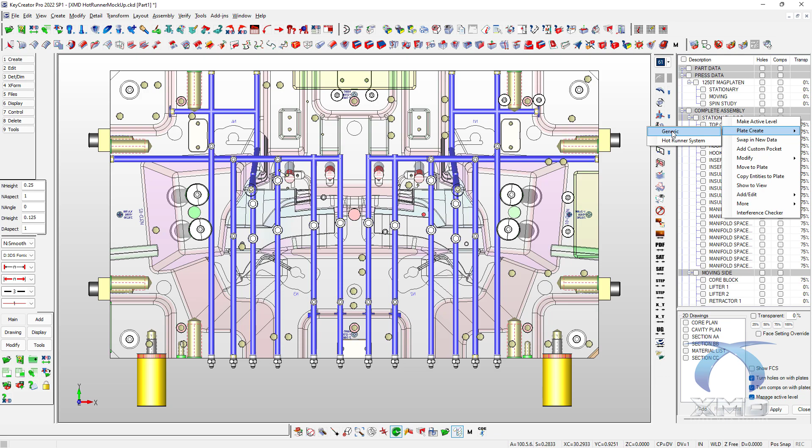So we're going to go into our design navigator. We're going to right click on stationary side, and we're going to tell it to plate create. So we have our generic plates, which does our lifters, slides, inserts, things like that. But in this case, we want to do a hot runner system. It'll come up with some information on the hot runner.

Maybe you're planning to get this quoted at a few different vendors, so we'll just put TBD in there for catalog number and vendor. You can always edit that after you know who it's coming from and what all that info is. We wanted to draw in the 3D hot runner system, and we wanted to draw in the drop bores as well. And this will allow us to have something in our cavity block that we can work water around.

Generally what I'll do is I'll aim to be bigger than what I expect the drop bores to be. You may even be able to get some information from your supplier right away to put in those sizes if possible. If not, just put something in that is a guess that is hopefully larger than what you really need and gives you a little bit of space.

We want a 4-drop system, so apply that. And we're going to use the mirrored function. If we were to use custom, then you would just select all 4 at different positions. Quadrant would allow you to pick one location, and that identical location at each quadrant would also get a drop. In this case, we're just going to use the mirror function.

We're also going to have it set to project the Z. That way, because I have a cavity solid block, it will automatically work out the lengths of the drops for me. I don't even have to figure that out. If you don't have your design quite that far, you can turn this off and you could actually specify where the drop tips will be.

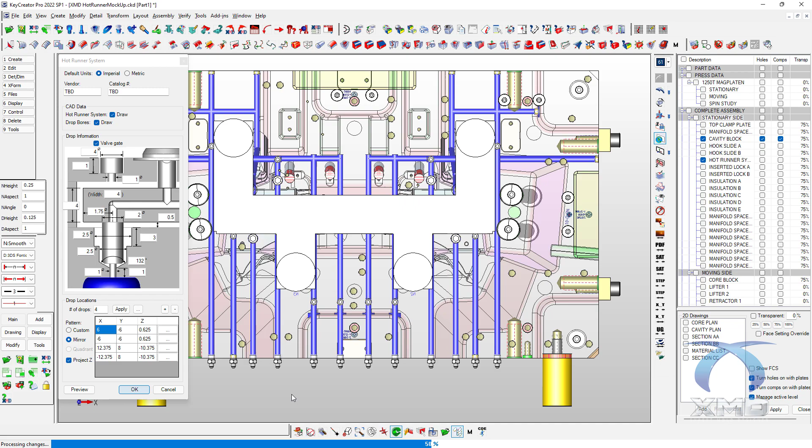Once again, it's just a mock-up. It's something that we can now send to our supplier and say, okay, this is our manifold location, our drop locations, how long the drops are. Obviously, you put your engraving on the side of the block or something showing where top of mold and operator side is, so they can put all the fittings in the right location.

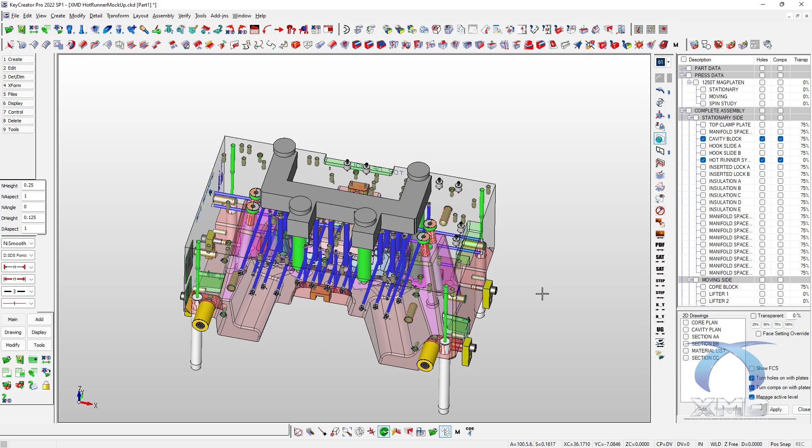And then you can go ahead and output this file. Right, so you can just turn on whichever plates you need, including the part data, output a step file, and your supplier will have a location. That's it for adding a mocked up manifold.

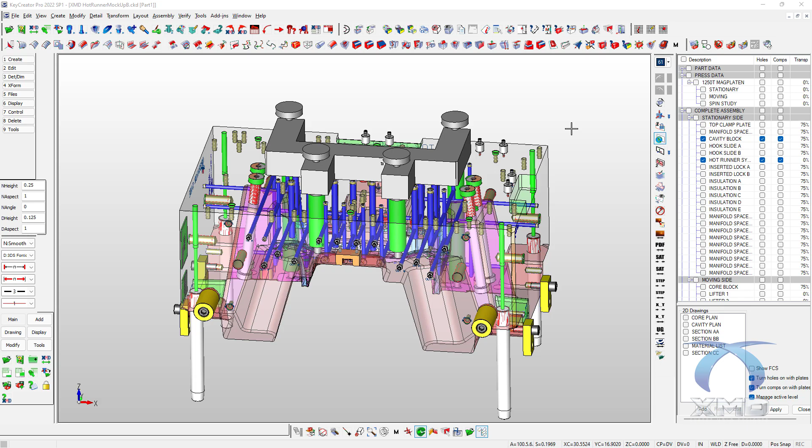Okay, so our next stage here is to bring in the design that we received from our vendor. Right? So what we're going to do is we would import step or parasolid or whatever file type they send us, and just put them on dummy levels, non-XMD levels. So in this case, I put their manifold system on 5001.

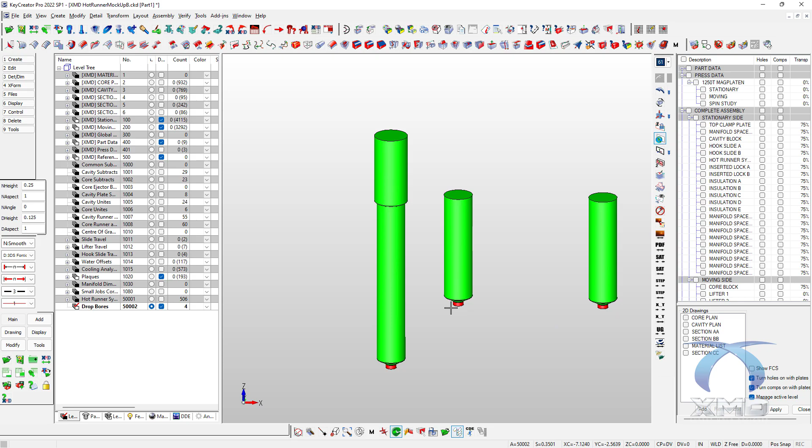I also separated the drop bores onto another level, and I color coded them to whatever my company's specs are for clearance and critical holes. Right? That way I can show you a really cool feature for that as well. So what we want to do is we want to turn on our hot runner system in our cavity block.

And what we're going to do is we're going to right click on hot runner system, and we're going to do a modify, right? And what we want to do is turn off the drop bores now, because now we have really specific ones that our supplier has sent us. And we also want to, while we're at it, update our vendor and catalog stuff since we know it.

Okay, so I'm just going to put Acme for the vendor, and we'll just say the catalog number is whatever, right? So it's generally their project number, whatever the project number is for that, for our vendor. And go ahead and say okay.

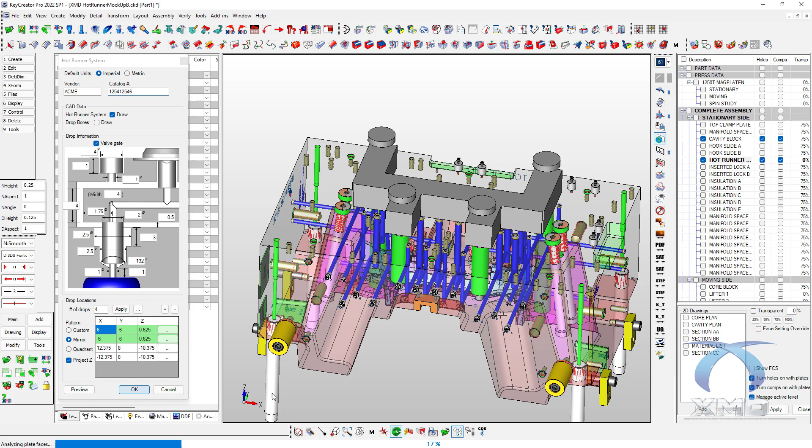That's going to update our design in our material list to have the catalog number and that vendor, and it's going to also remove those drop bores that we're currently showing in our cavity block. This will then allow us to use those drop bores we received from our manifold supplier and apply them to the cavity block instead.

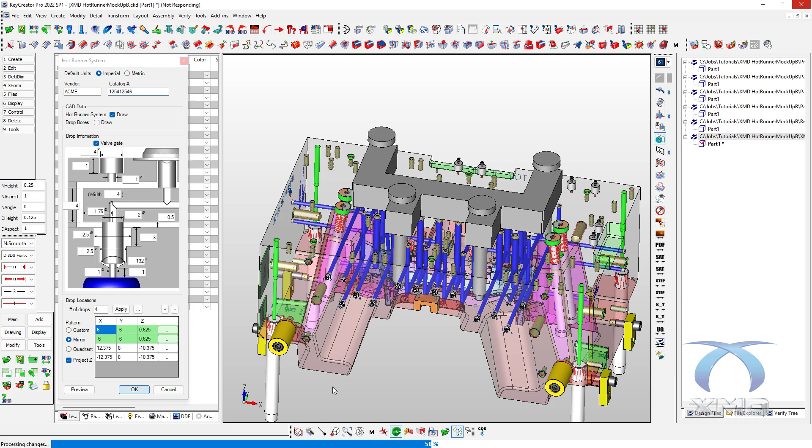So now that we've done that, what we're going to do is we're going to go ahead and do a swap. Okay? So we have our hot runner system, we brought it in. Now keep in mind, they don't always provide that system in the exact mold location depending on the vendor, so you may need to tweak that into the proper location.

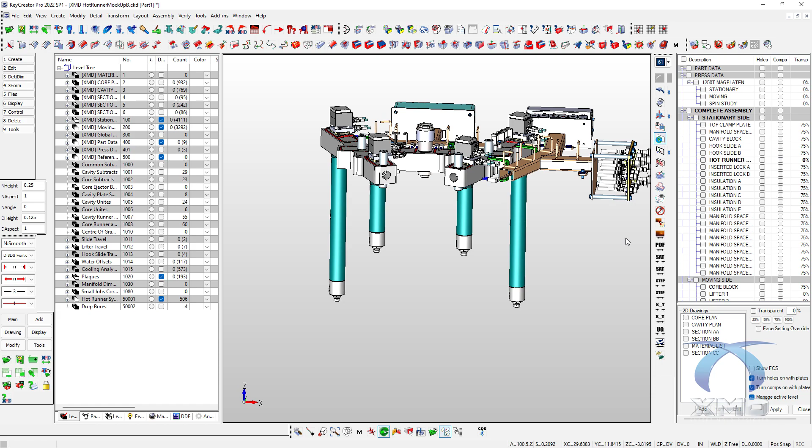But then what you can do from there is you're going to tell XMD to swap the existing hot runner system that we have in there, the mock-up one, with this actual finished one. So we're going to right click on here and just do a swap in new data, just as if you were swapping in new inserts or anything like that.

Okay. And then what it's going to do is go ahead and swap all that information in with that hot runner system, which will include having it as an external reference. So by it being an external reference, you're taking all that heavy geometry and that extra file size and you're putting it outside of our parent file, which results in a smaller file for save times and things like that.

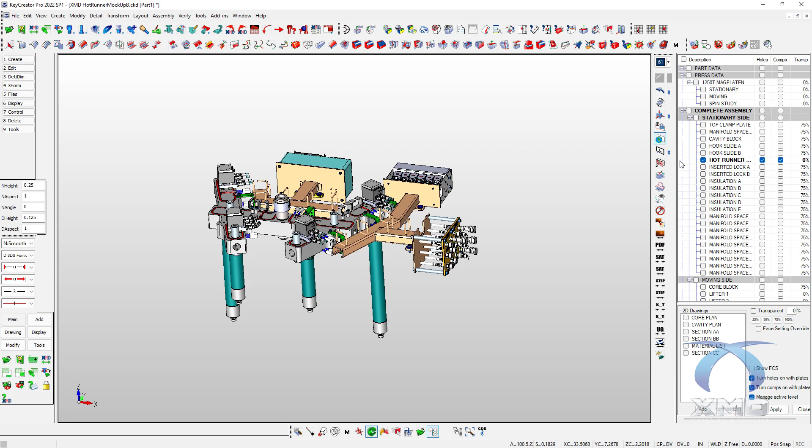All right, so now that has been swapped in. So now when I click on Hot Runner in my Design Navigator, as you can see, that is now part of our design. So the last thing we want to do is we want to take those drop bores and we want to make these custom subtracts, right?

So we're going to go like this. We're going to right click on here. You're going to click on Add Custom Pocket, right? And now all you do is click each of those solids. Obviously you can do this with anything as well, any additional things, but the drop bores look really nice.

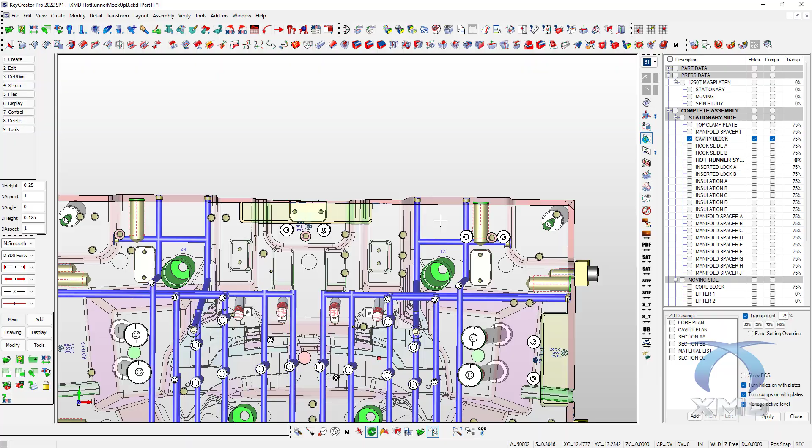Yeah, it goes ahead and checks that, and it'll treat these very much like your block and your solids and holes and stuff. So when you use your XMD interference checks, it will check your water to these bores to make sure that there's no issues. And that's it. You now have your hot runner system applied to your design.